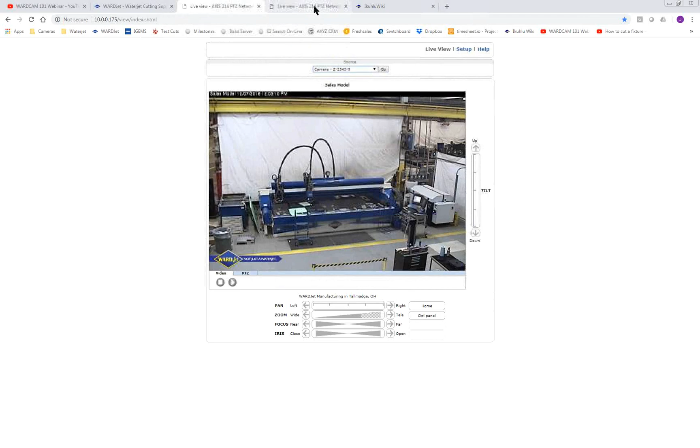Let's see, sales model, that one there, so we'll close those out.

So first of all, let's review where you'd be able to find last month's webinar. If you weren't able to attend it, or want to review it, or have somebody else in your company watch it, go to the WARDJet channel on YouTube and search for WARDCAM, and this video will come up.

So I'll go back to the WARDJet YouTube page, and on here you can search for WARDCAM and it'll be on the first couple of videos there. It's about an hour-long video you can watch for the basics of WARDCAM.

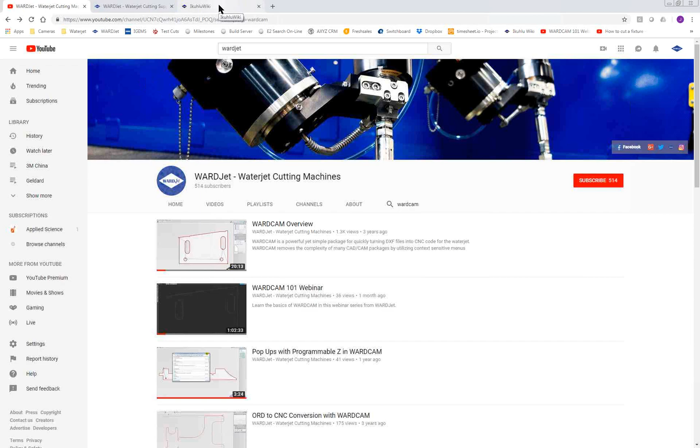I wanted to review updating WARDCAM. Periodically you might want to update your WARDCAM, or if you're going to be installing it on a new computer, you want to do that.

Basically, you can go to this site here, ikuhlu.wardjet.com, which will bring up this main page. Down here we've got the WARDCAM area. As I mentioned in the previous webinar, we've got two versions of WARDCAM out right now. We've got this latest version that we're calling Midnight WARDCAM—if you haven't seen it yet, you'll see in a moment why we call it that—and then down here we've got the older version, the Sun edition of WARDCAM.

If you've got the older edition now, with the USB dongles, this would be the version you'd want to download. And if you're using the newer Midnight WARDCAM, this would be the version you'd download, and then somebody from WARDJet would have to log on to that computer and activate it.

So I'm just going to go ahead and download this here. It just takes a moment—we'll stick it in my downloads folder. Let me go ahead and close out of my current WARDCAM. All right, it's a pretty quick download, so I'll double click on that and click on Run.

Key thing when you're doing this installation, especially if you've already been using WARDCAM for a bit and have materials set up the way you like, is—you may get this little warning that comes up—just click on 'Allow this file.'

You'll get to a screen where it's going to prompt you for whether you want to overwrite your material database and posts and things like that. You can choose your installation location. If you've modified your materials and have a lot of custom materials, you'd want to uncheck this overwrite database box so your materials won't get overwritten. If we've done custom posts for you, with unique machines from different manufacturers, you'd want to uncheck the post box also, but I'm going to leave mine checked for right now—actually, I'll undo it, I don't know what I've done. Click on Install, and again, it's a fairly quick installation process.

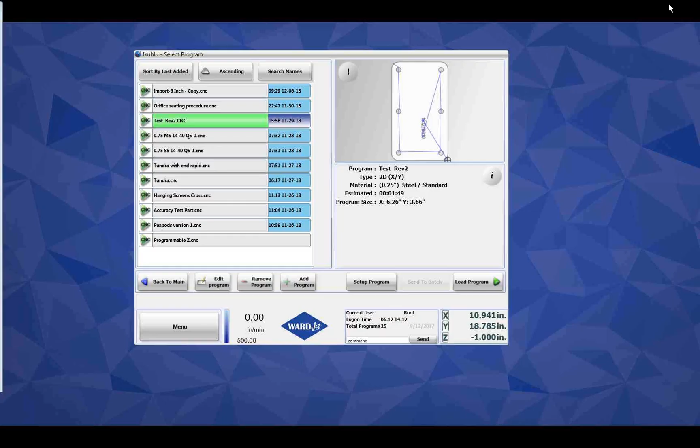So that's done, so now I'll go ahead and start it up. It's coming up on my other screen here, so I'll drag this over. This is the newer Midnight version of WARDCAM for those of you who haven't seen it before.

I'll show you where the backup files are stored, just in case you ever want to check that out. Let me bring this over here. So basically, the Midnight WARDCAM is installed under C program files. The older version of WARDCAM is installed under program files x86.

If you're doing the newer version under WARDCAM, we have this backups area here. This is going to have every backup that's been made for every installation of WARDCAM you've done. So back to my very first time installing Midnight WARDCAM, I've got the backups here. If you go into any of these and then into the data folder, you've got both your machine and your material database. So if you accidentally overwrite your material database, you should have a backup here.

Next we'll take a look at common line cutting. A lot of people, when they first get WARDCAM, are interested in the ability to do common line cutting, which is using one cut to separate two parts and save on cutting time. So if you have two rectangles, rather than use two separate cuts to separate them, you put them close together, basically your stream width apart, and then come with one cut down the middle to separate them.

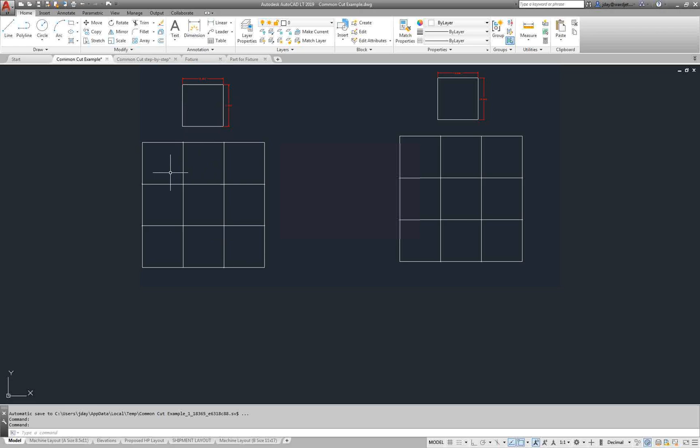Typically you're going to start in your CAD package and draw something out. So if I want to cut, say, 9 squares like this, 12 by 12, what I'd typically do is first array it out. When you array it out, you want to leave your stream width between the parts - here I've got a 40 thousandths gap between each of these. So you lay it out for your stream width depending on the nozzle you're using.

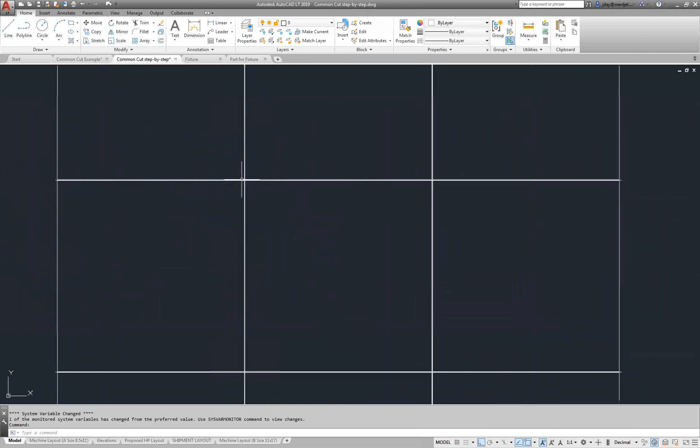The next step is you're just going to draw some lines down the middle between each of those parts, and that's going to be your common cut. When you program these cuts in WARDCAM, they're considered open contours. We don't apply any tool offset to open contours, so that's why you have to put the gap between the parts, and we'll basically go right down the middle of these lines with our stream.

A couple other things to pay attention to: you want to extend your lines a little bit beyond each edge so you can pierce off the edge of the parts to avoid blemishes. Another thing I like to do is put a little line segment, 10-20 thousandths of an inch long, at the beginning and the end. This forces WARDCAM to put code in so it cuts slowly when it first starts off here.

If you just do this as a straight line, WARDCAM doesn't apply any ramping to straight lines, so it's going to start off at whatever cut quality you chose for that open contour, which could be too fast and might take a quarter inch or so before the jet actually cuts into the material. So to avoid that, just put a short little line segment there, and that'll make it do this area nice and slow, and it should pierce through before it gets to the part.

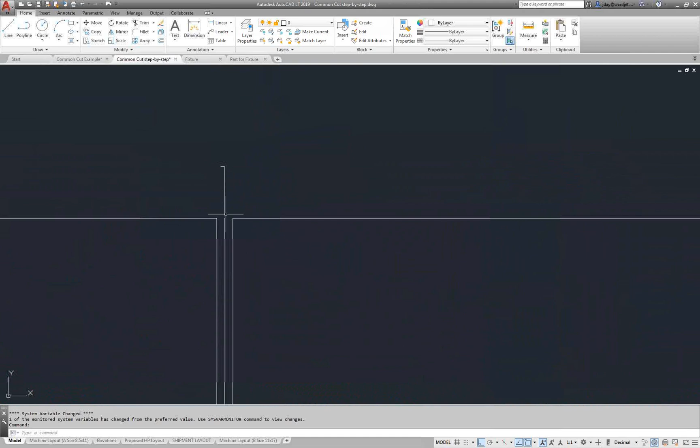I've got the same thing at the other end here when it's coming out. Having that little line segment there forces the waterjet to ramp down and slow down when it's coming to the end.

After doing that, I would basically just draw a rectangle around the parts, and this yellow rectangle I've got here is actually the geometry I'm going to use as my closed contour to cut around all those pieces at the end.

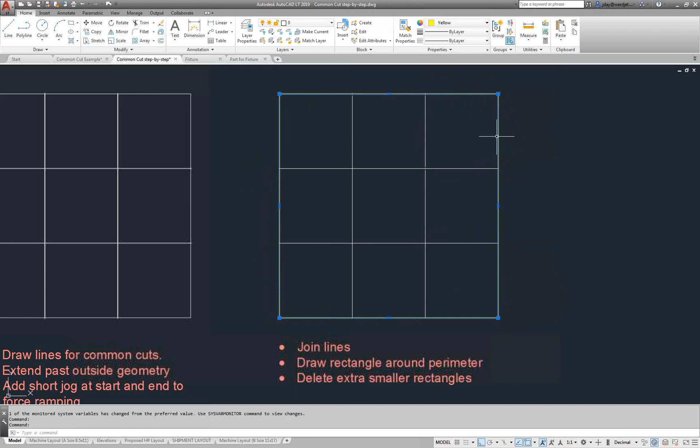So that's one way to do that. The other way, if you wanted to be even a little fancier with this one up here, we would have 5 cuts: two horizontal, two vertical, and then the fifth one, the outside cut.

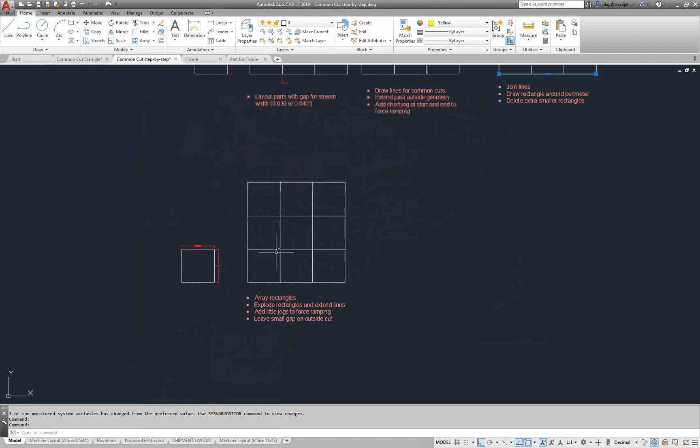If you wanted to, you could get it down to 4 cuts by doing it with a technique like this, where on the outside cut you also offset it by your 20 thou per side, and then leave a very small gap at the end here. This will make this cut also an open contour, and we'll use our open contour command to program the outside cut.

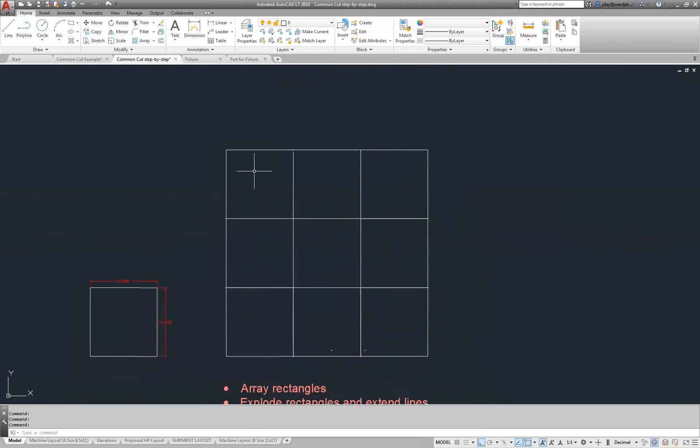So here I program my rectangles at 12.040 to account for my stream width. I arrayed those out and then basically connect lines top to bottom so that we can use that in our open contour command for our toolpath.

So let me just run those through WARDCAM so you can see how that would work. We'll do this one here. In this drawing file, I have both versions side by side.

So if we zoom in, you can see the little line segments there for the ramping, and this one here at the end we've got the little gap so we can do that outside cut, and this last vertical cut is one cut. So we'll start with this one here on the right first.

So I'll just go to my next process, and I'm going to go with a 1440, and I'll just do aluminum quarter inch. So these gray lines are open contours because the start and end points don't connect.

So I come over here on the right, choose my open contour cutting, choose what quality I want to use for this open contour cut. We'll just stick with normal. And then I can just click on whichever end of the line that I want to pierce at for the open contour cut. So if I want to start over here with this line, I click here.

And then as I click, it's adding these cuts to my cut order up here. I'll pierce this one over here, and then start this one here, and then this one here. So that would take care of those 4 common cuts.

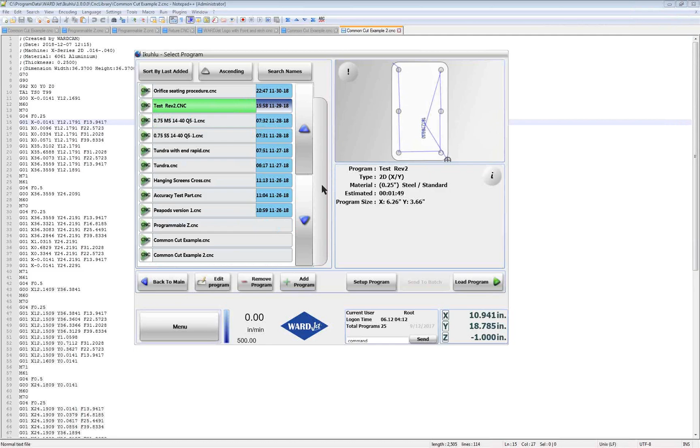And if we wanted to take a look at it in our little controller simulator here, either one of these can go into my edit file area here. And if I zoom in down here, we can see whatever segment here is highlighted red -- that's the line of code that we're on right here.

So it basically slows down for that little corner and then is going to speed up and do the rest of the cut at 39.8 until it gets to the other end and slows down for that there.

So that's basically how you can program for common line cutting. It does take a little bit of work on the front end in the CAD to get it laid out properly, a little bit of thought involved, but it is something that can be done.

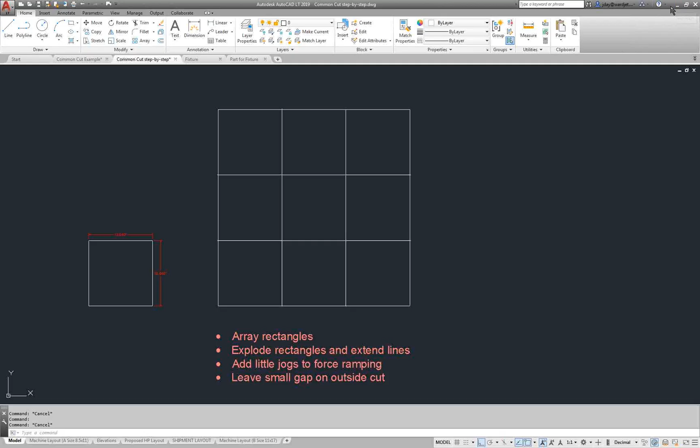Next up, I want to show you how to take advantage of programmable Z-axis motion, if that's a feature on your machine. Not all of our machines have programmable Z motion. One way you can tell is at the controller, if you look down in the lower right-hand corner, you'll see Z coordinates, which is one good clue that you have programmable Z.

Also, if I come into my move panel and I'm able to tell the Z to move a specific distance, like move down, which means going negative, we'll go down 1.25 inches, click play, and my Z-axis moves. This tells me I've got programmable Z on this machine.

Sometimes having programmable Z is great because if you have parts that might tip up, you can program the head to move up and down between cuts and hopefully avoid some collisions, hopefully all collisions.

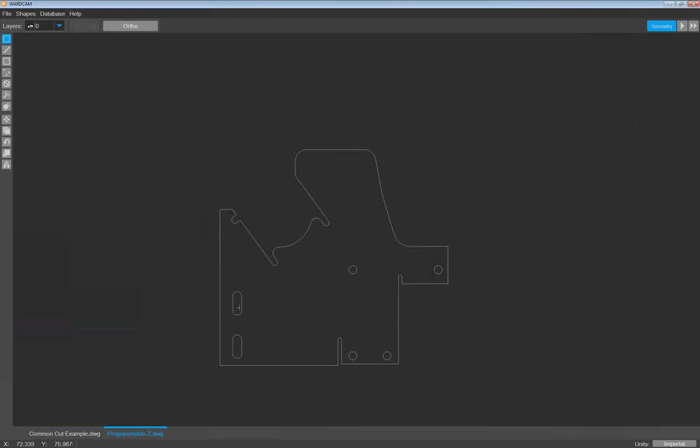So let me open up a different file here. A part like this - if we're concerned about slugs or the part tipping up, we can just go through and program it as normal. I'll stick with 1/4 inch aluminum, do whatever for the toolpath, and hit the next button. Normally, unless you've already turned it on, we would not see any Z codes between these cuts.

So water and abrasive is turning off, and then we have a G00, which is a rapid traverse - there's no Z motion in this program right now.

If I want to make some Z motion, I go into the options area, click on edit variables, and it opens this window. I scroll over to the height sensor tab, and if you scroll down, you'll have options here for 'use height sensor'.

If you turn this on, that tells WARDCAM that you want to use a height sensor, but we're not actually using a height sensor - we're going to use Programmable Z instead.

To do that, we've got fields up here to set things like height sensor up, which rather than using the normal height sensor code, G95 or G98 or 9, we're just going to put in G00Z1, which tells the cutting head to move up 1 inch. Then we also have height sensor down, which we'll set to G00Z0, bringing the cutting head back down to where we started the program from.

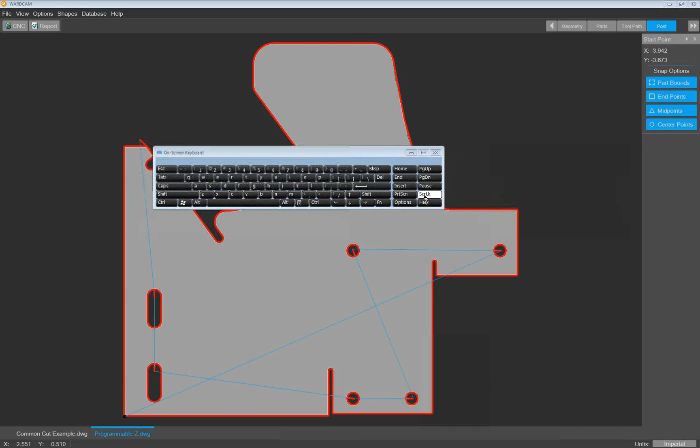When the scroll lock key is turned on, every option available, for example in this options menu, is visible. On the right-hand side, any buttons that are gray mean those options would not be visible if my scroll lock key were not engaged. If we go to the height sensors tab, all these buttons are blue, meaning if I turn the scroll lock key off, they'll still be visible. If I didn't want some of these visible, because I didn't want somebody messing with them, I can turn them off.

We'll turn off a few of those. Whatever we want visible, click save and exit, then turn my scroll lock key off and go back into edit variables, back onto the height sensors tab. Now those ones I turned off are no longer visible. So that's one area where the scroll lock key is used.

So turn that back on and minimize that again, save and exit. Now that it's on, I go back into edit variables and everything's visible, including the buttons to turn things on or off. If you have a tab you don't care about—let me turn this back off again and come back here, save and exit.

If you don't care about seeing this Tools tab, because it's related to things like drilling and tapping, in order to make an entire tab disappear, you have to disable all the options that would be on that tab. So let's go back in here one more time, and again we see all the different tabs available: pipes, printing, reports, and then tools.

So if I turn all these ones off, then when I turn the scroll lock key off, that Tools tab will no longer be visible normally. Clicked in the wrong place there, so I'll have to do that again—let's see if it remembered it. Turn that off. Tools. All right, save and exit. And now that tab will be gone.

One other place the scroll lock key makes a difference is on the database menu—normally we only see the material and machine database. If I activate the scroll lock key, we get this global settings window, with a lot of settings at the top I wouldn't mess with. One thing of interest for people with multiple users on WARDCAM, who want them all pointing at the same machine and material database, is down at the bottom you can choose where WARDCAM is looking for that database.

So if you've got 2 or 3 people programming on WARDCAM, or WARDCAM installed at the machine and also in your office, you want to work off the same material database. You can put that database onto your network and point both seats of WARDCAM at that same location to work off the same database. That's one place you'd want to use the scroll lock key to get into global settings. Otherwise, I wouldn't change any other settings in there.

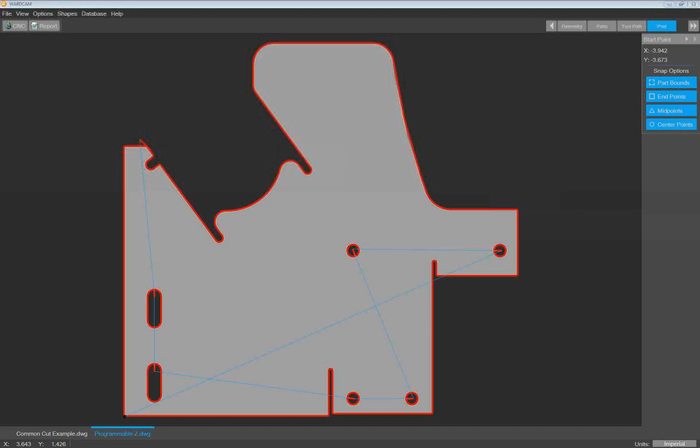All right, I'm going to show you a couple other things on the parts screen where we did our open contour cutting before. Let me open up this file here. This file has different things to show some of the capabilities we can do in WARDCAM. Here we're going to just cut this slit, and similar to that other program, I put a short little line segment here to force WARDCAM to start off slowly when it cuts this slit.

These numbers up here we're going to etch. We're just going to pierce a point at this hole, presuming it's too small to cut with the Waterjet, so we'll pierce a location hole and assume we're going to drill it offline. And then I've got this point here off in space that we're going to use as a point to go to and stop, and I think that'll cover it.

Over here on the left, we've got some editing tools, so that's why I've got some errors in this drawing. If you bring in a DXF file, it's got some gaps or lines that are extended too far. You've got things like your trim tool - activate your trim tool, and you can click on the line segments you want to get rid of.

When you're in a command, it's going to be highlighted blue over here. If you hit escape, it's always going to bring you back to the select level.

If I want to close up this gap here, I can use the line command, and as I hover towards the end of a line, that little blue square is going to show up, indicating that when I click, the line will be at the end of that line, and then click again, and we got a line at the end of that line, so that closes up that geometry.

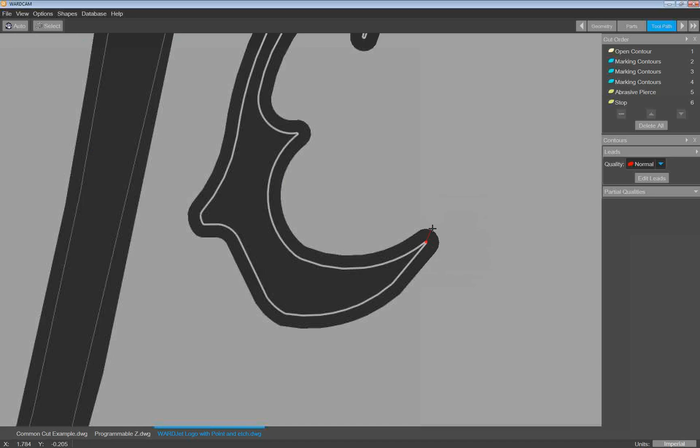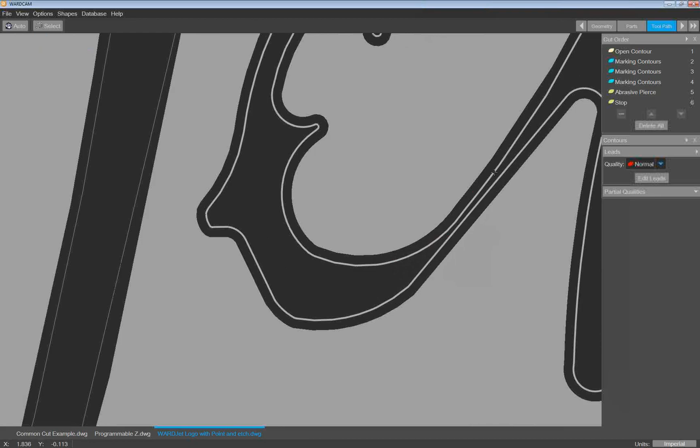All right, so we'll hit our next button. Of course, now at this point we'd normally add our leads, but you can see over here our T has disappeared, and that's because the gap here is smaller than the stream width. So I told it that I was going to use a 40 thousandths abrasive nozzle, and it looks at the stream width and sees that it can't actually get through that gap because of the width of the stream. So I'm going to go back and switch to a 1030 nozzle combination, and we'll switch back to our aluminum quarter inch and hit enter again. Now we can get through there because it sees that the gap allows the stream to pass through without actually cutting into the part.

So if I hit the auto button, we'll put our tool sequence on there like normal. Of course, with a part like this, I would look at maybe changing pierce locations depending on, so I'm not too close to other geometries. Might move this lead here or this lead here. So sometimes you might want to go through and just optimize where WARDCAM put the lead. And then sometimes you might want to have a lead on the corner of the part to minimize the witness mark. If we click on Edit Leads, there's a couple ways of doing a lead on a corner.

If you set your tab width to 0, so I'm working with my outside lead here, and I set my tab width to 0, and click Save and Exit. I'll just hit Auto again to take what we've got here. And then I click over here on the corner, it'll put the lead on the corner, or whichever corner I want to put it on. So that's fine if you don't mind not having a tab. If it's a big enough part, you can do it like that.

If you want to have a straight line lead-in on a corner but also want a tab, then go back into Edit Leads, and again you have to have your Advanced button turned on, and these in-angles and out-angles will show up. So if we want, say, a 20 thousandths tab, we've got our out length set to 0 because we don't want any lead outs. Set our in and out angles to 0, and then Save and Exit. And then I can click on this corner here, and might have to click a couple times to get the angle I want, but that's how you can put both a tab and a lead on a corner.

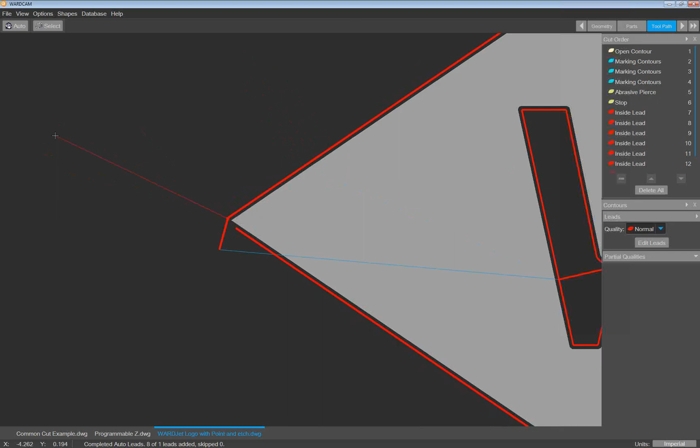And then if you go back here, like this, it's still going to do a straight line lead-in, so then you'd have to go back and change it. But this is the example if you did want to lead in on your corner with a tab. So that is basically what I wanted to show you on that one.

There's a couple areas here that we can look. So the data area has, again, your material and your machine databases, which we'll come back to here in a little bit.

If you go into the scripts area, under posts, you can have different setups for different machines. I've got one set up for a multicam machine, one set up for somebody with a Burny controller, and a couple different versions of WARDJet machines set up, including a WARDJet water-only machine.